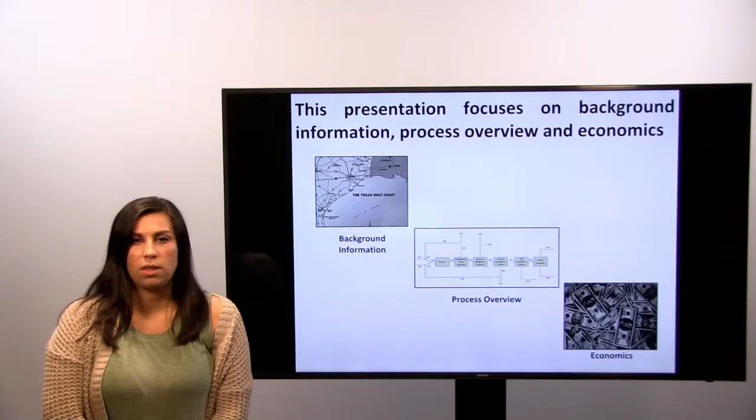This presentation focuses on the design, economics, and feasibility of the xylene plant. The location and plant capacity details, as well as an introduction to the plant, will be discussed first. Following that will be an overview of the products and design of the process. Lastly, economics and future recommendations based on the feasibility of the process will be discussed.

The xylene plant is built in Nittany Lion Chemicals' existing Gulf Coast complex located in Houston, Texas. The plant capacity is 86 million pounds per year. The capital costs for the paraxylene plant are $82 million. The startup date for this plant is expected to be January of 2023, producing a desired paraxylene product as well as ortho and metaxylenes and benzene.

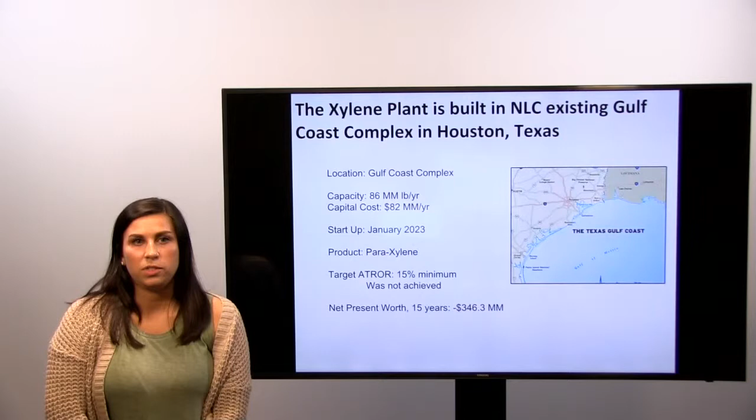The target after-tax rate of return is 15%, but because we were not making a profit, this value was incalculable. The net present worth at 15 years is negative $346.3 million. The xylene plant produces valuable paraxylene as well as ortho and metaxylenes and benzene.

The main reaction taking place to produce mixed xylenes is toluene disproportionation. In this reaction, the toluene feedstock of 55,000 pounds per hour is converted into mixed xylenes and benzene. Two side reactions that take place in the reactor are toluene hydrodealkylation and xylene disproportionation. These side reactions produce undesired benzene and trimethylbenzene.

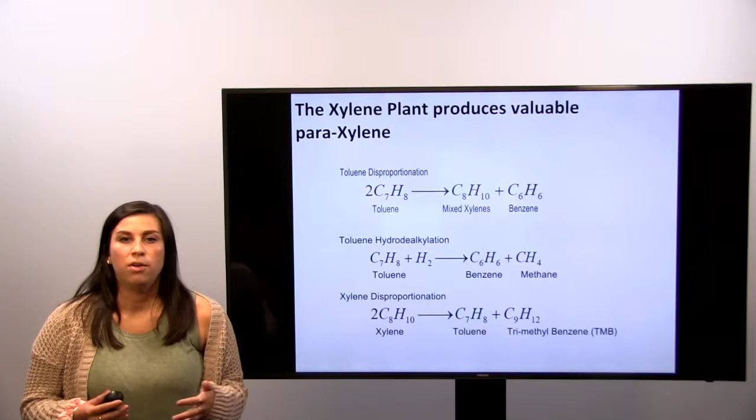In order to rid of these undesirable products and to separate paraxylene from the mixed xylenes, a Parex separator was used. All other undesirable byproducts were separated by distillation columns. According to market data, the compound annual growth rate is 10.5% for paraxylene over the forecast period of 2018 to 2023 and will continue to grow for the use in the polyester manufacturing industry.

All hard specifications and most of the soft specifications are being met. The only hard specification for this project was to achieve a 99.9% purity of the product streams. For example, our products for this project are paraxylene and benzene. The benzene product stream is currently achieving a product purity of 99.9%, and the paraxylene product stream is at 99.96%. There were a lot of soft specifications for this project.

Some of them included in this presentation are stream composition and reactor pressure; these soft specs will help prevent coking of the catalyst in the reactor. In stream compositions, there was a soft spec requirement to achieve a molar ratio of hydrogen and toluene of 2 and a hydrogen partial pressure in the reactor of 250 psi.

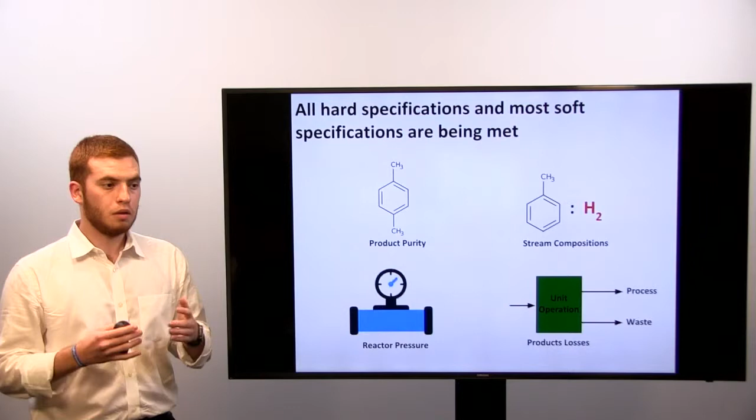One of the soft specifications that is not currently being met is product losses of benzene, toluene, and paraxylene across the plant. The major sources of these errors are the toluene purge stream that is currently set at 30% and the vapor distillate in the benzene distillation column due to a partial vapor and liquid condenser.

Flammability and health hazards pose major safety issues. All of the chemicals used across the plant are flammable. For example, according to the National Fire Protection Association, hydrogen is rated at number 4 on the flammability scale, as you can see in the fire diamond diagram.

The plant uses organic compounds, for example, toluene, benzene, and paraxylene, which are rated between 2 and 3 in their respective fire diamond pictogram. This is a major concern because of the high pressures and high temperatures used across the plant. For example, 750 Fahrenheit in the reactor, and heat exchangers and distillation columns that operate above 300 Fahrenheit.

Also, chemicals used in the plant pose a major health hazard. All of the chemicals used are irritants, which depending on the exposure time and exposure concentration, can lead to organ damage or tissue damage. Additionally, benzene, one of the major chemicals used in the plant, is carcinogenic.

This is a main concern for employees who can be in direct contact with chemicals, for example, operators and engineers. This is of great concern because proper personal protective equipment and process control systems in the equipment have to be properly installed to avoid any catastrophic events.

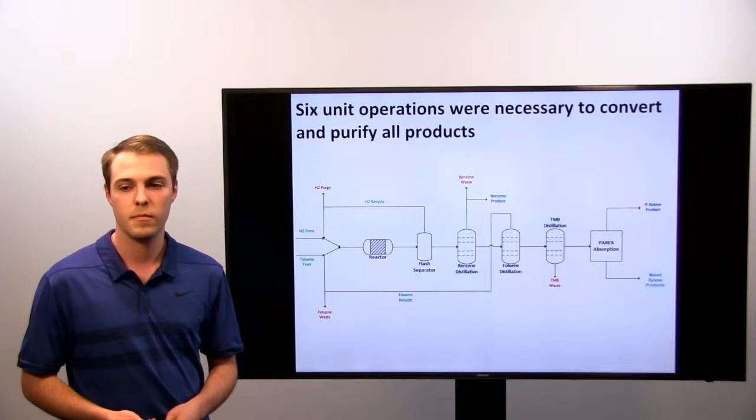Hi, my name is Rosa Garcia, and upon economic analysis, we found that the total plant cost was estimated to be $82 million. Of the $82 million, the inner battery limit accounts for 51% of the total capital. The inner battery limit consists of the reactor, the flash separator, the benzene tower, the toluene tower, the TMB tower, and the Parex tower. Parex is the most expensive, but its price is dependent on flow rate.

The reactor is operating at a high temperature and high pressure, and these operating conditions highly affect costs. The towers are relatively inexpensive, with benzene being the largest, then toluene, and lastly, TMB. The escalation and contingency are about a quarter of the capital. The only way to reduce this cost would be to rush construction, which would not be a good idea. There is no way to change the project contingency.

Total OBL takes into account the site development, utilities, environmental impact, and raw material and storage. Startup, team costs, and other miscellaneous costs account for about 10% of the total capital. The total cash cost exceeds the profit for the paraxylene plant. The capacity of the plant was 86 million pounds per year. The total cash cost of the plant was 126 cents per paraxylene pound. The cost of the total raw materials accounts for a large portion of the total cash cost. Cash costs must be below the sale price of paraxylene to create a revenue.

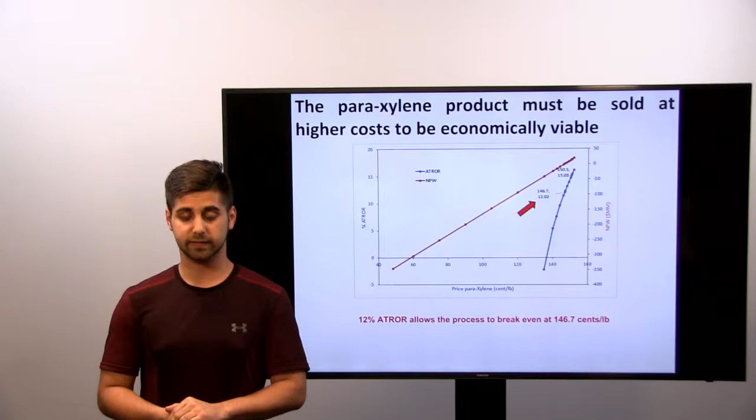If we were to artificially increase the market price to 146.7 cents per pound of paraxylene, we would be able to accomplish a 12% after-tax rate of return, which would, after 15 years of operation, allow our plant to break dead even and not lose or gain any money on the system. The target for this project was to reach a 15% after-tax rate of return, which at our current design would require 150.5 cents per pound of paraxylene. This would allow us to reach that goal and would give us a net present worth at the end of 15 years of operation of $14 million.

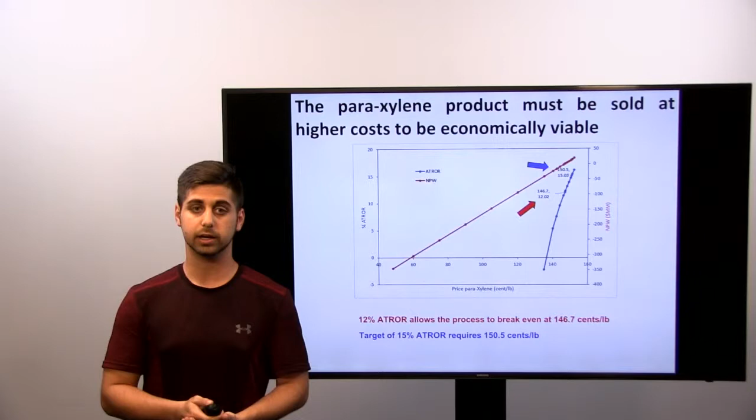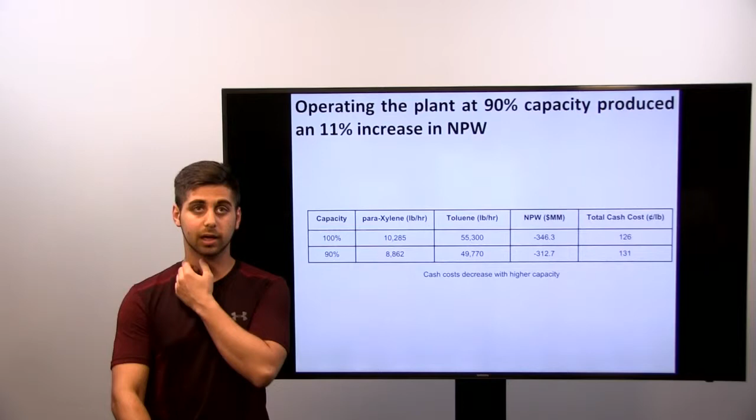As part of our economic summary, we ran some sensitivity analyses to see how our plant would run under different operating capacities and conditions and see how stable our plant could be. For one particular analysis, we turned the capacity of our plant down to 90% and actually saw a net gain in net present worth of up to 11%. This is unusual, but because our plant currently runs at a deficit, it makes sense that running at a lower capacity would actually cause us to lose less money over the 15 years.

So the flow rates of our product and feed streams are shown in the slides here, and we can see that the total cash cost actually increases, which is standard as you decrease capacity, but the net present worth actually increases due to burning less money. We can see that the base design has a negative $346 million net present worth, while decreasing it to 90% capacity has a negative $313 million net present worth. And again, that's an 11% increase.

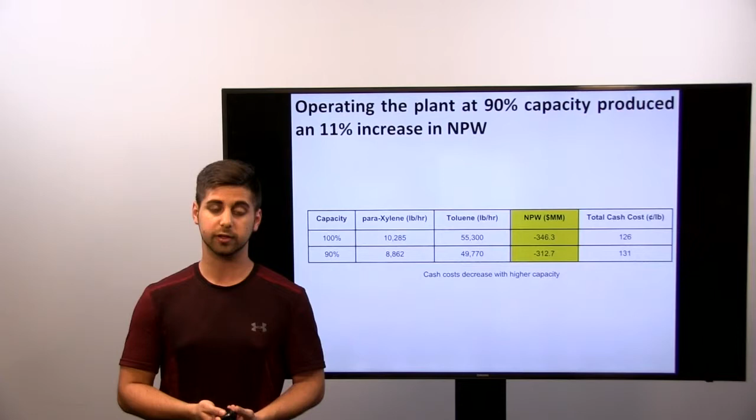We also ran some alternate design studies to determine ways to improve the current process and for future projects. We determined that purifying the toluene purge stream, which is currently 30% of toluene leaving the distillation column, so we have a 70% recycle, would actually add approximately $48 million per year of revenue to our plant. This is calculated by taking the amount of toluene that's being wasted, purifying that to a saleable amount, which is $49 million located here, and subtracting the revenue lost from burning the waste stream, which currently under base design gains us about $700,000 per year.

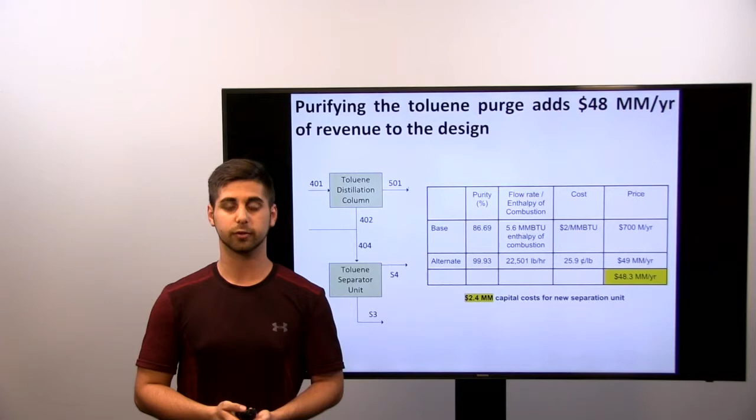The trade-off for this change would be adding one new toluene distillation tower, which, including heat exchangers and pumps, would have approximately a $2.4 million capital cost up front. But overall, this is greatly worth it and would vastly increase the economic feasibility of our plant. So finally, purifying waste streams with additional units could improve our economics.

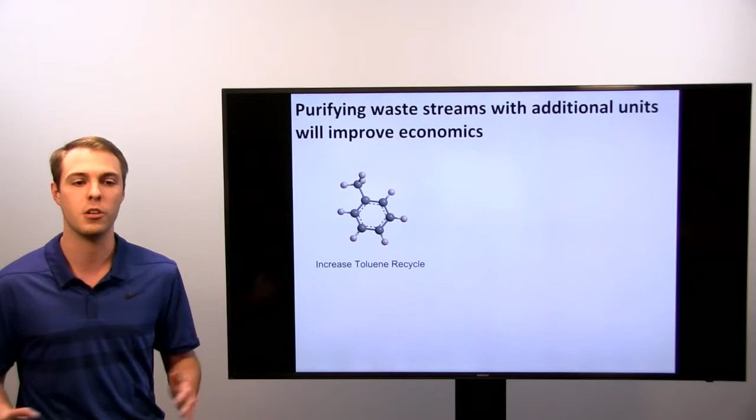So firstly, if we increased our toluene recycle, instead of purging 30% like we do now, and recycled 100%, this would add more toluene to the reactor and in turn convert into more paraxylene. Also, further purifying toluene and TMB products into saleable purities would increase saleable products and profit. And finally, adding hydrogen purification via pressure swing adsorption would allow us to purify methane from the hydrogen stream and allow us to sell the methane as fuel gas.